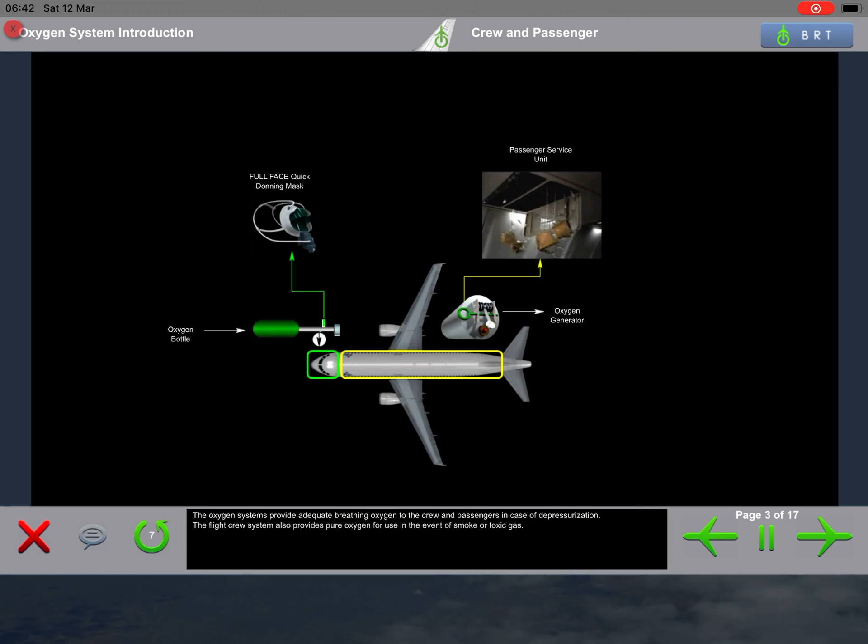A system for the flight deck, a system for the cabin, a portable oxygen system. The oxygen systems provide adequate breathing oxygen to the crew and passengers in case of depressurization. The flight crew system also provides pure oxygen for use in the event of smoke or toxic gas.

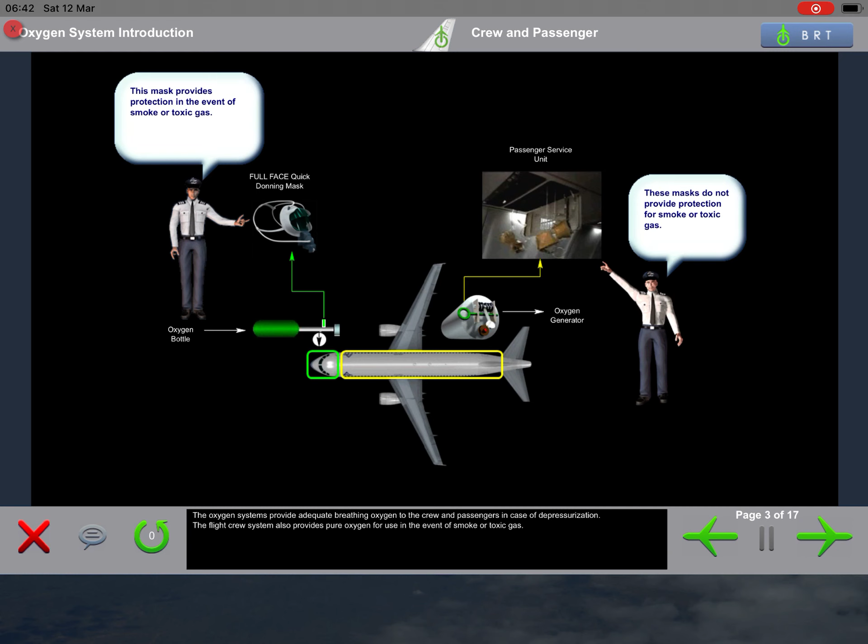The oxygen panel is located on the forward left side of the flight deck overhead panel. Normally, the mask manual on switch guard is closed, the passenger system on light is out, and the crew supply push button is on.

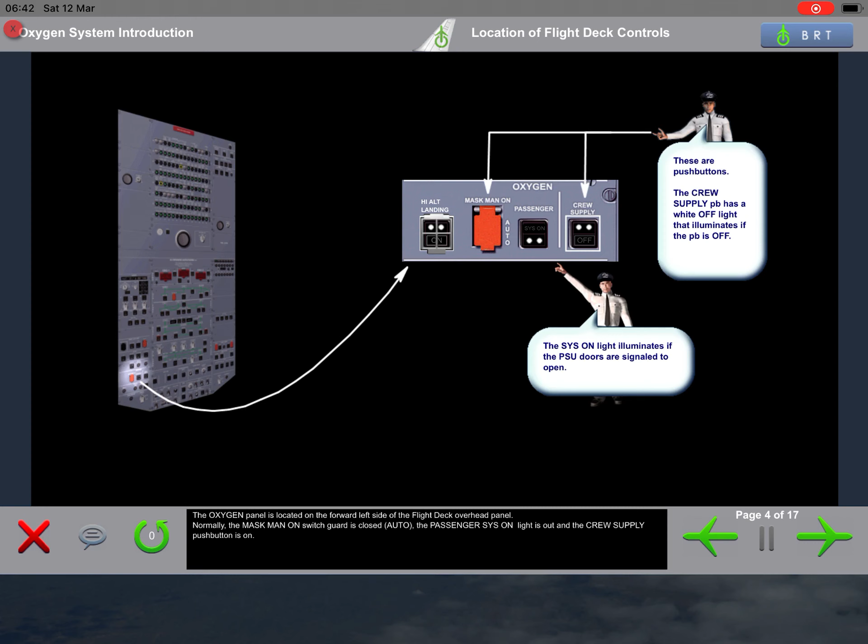The flight deck oxygen system is a gaseous bottle system that delivers regulated oxygen upon demand or can provide forced oxygen. It will provide diluted oxygen upon demand up to a cabin altitude of 35,000 feet, and above this cabin altitude will force oxygen at 100% to the crew member.

There is also an emergency feature designed to provide forced 100% oxygen pressure flow to the crew member upon selection of the emergency mode.

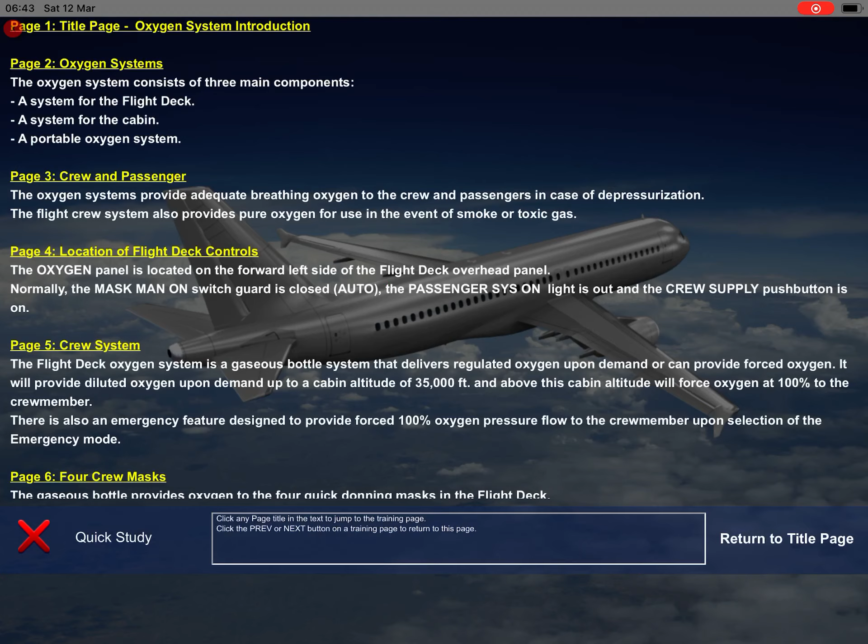The gaseous bottle provides oxygen to the 4 quick donning masks in the flight deck. 1 pilot mask and 1 observer mask are contained in separate stowage boxes within 2 covered compartments in the console outboard of each pilot seat. Each crew mask is equipped with a microphone, but the 4th occupant has no transmitting capability.

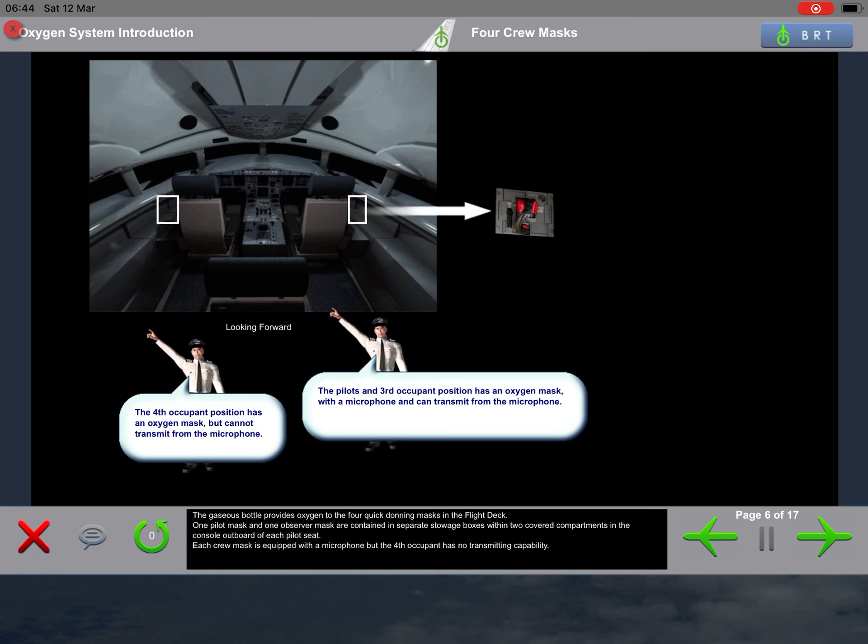The door Oxy ECAM page displays the unregulated oxygen bottle pressure. This ECAM page will also provide amber indications if the system is off or the pressure is low.

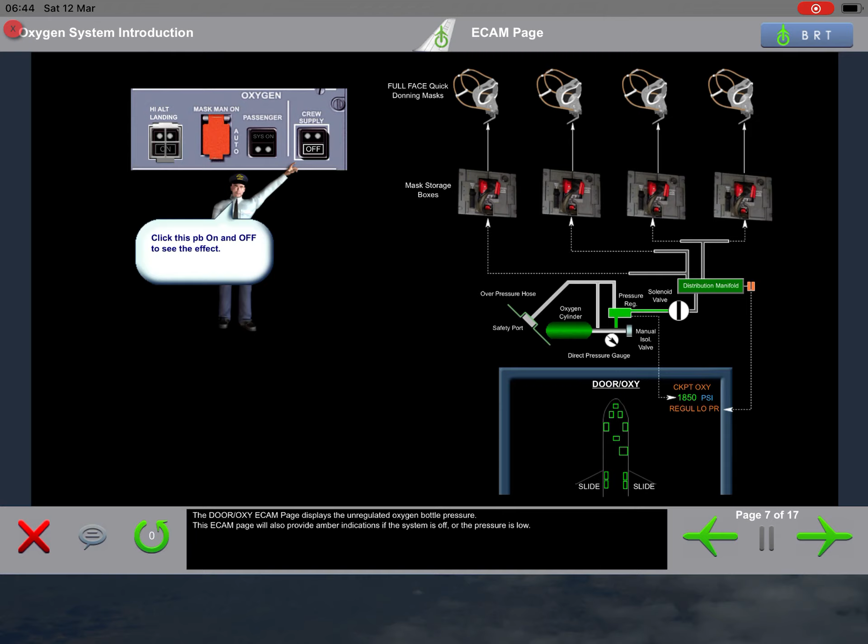The cabin oxygen system is available to all passengers and flight attendants and is separate from the flight deck oxygen system. The cabin oxygen system is a continuous flow system. The amount of oxygen delivered to each mask is very low and is added to the ambient air that is drawn in by the user through valves in the front of the mask. The cabin system is designed for a depressurization event and does not provide smoke protection.

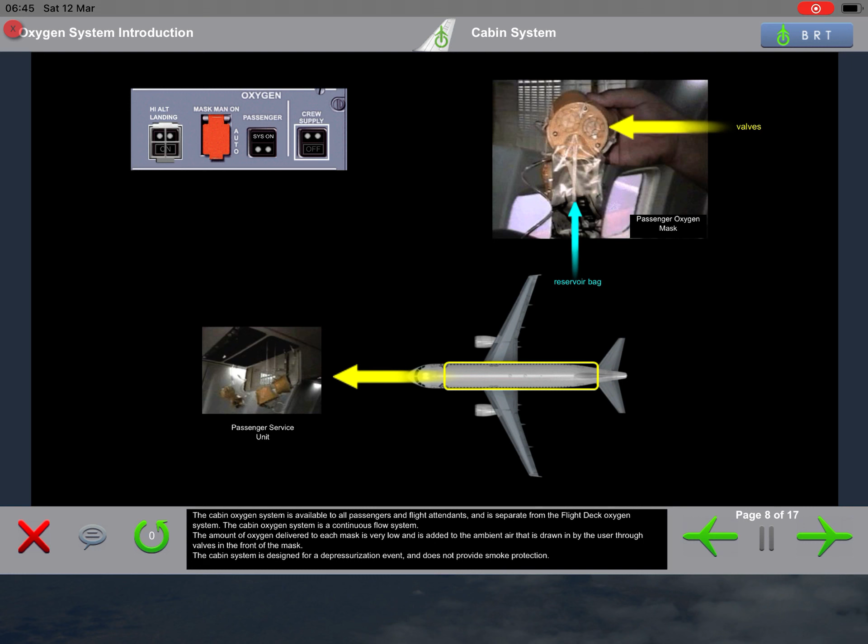The cabin oxygen is supplied by chemical generators that are located throughout the cabin. Each generator can provide oxygen for about 15 minutes to 2, 3, or 4 masks as equipped. The masks and associated generators are installed in containers above the passenger seats, in the lavatories, in each galley, and at each cabin crew station.

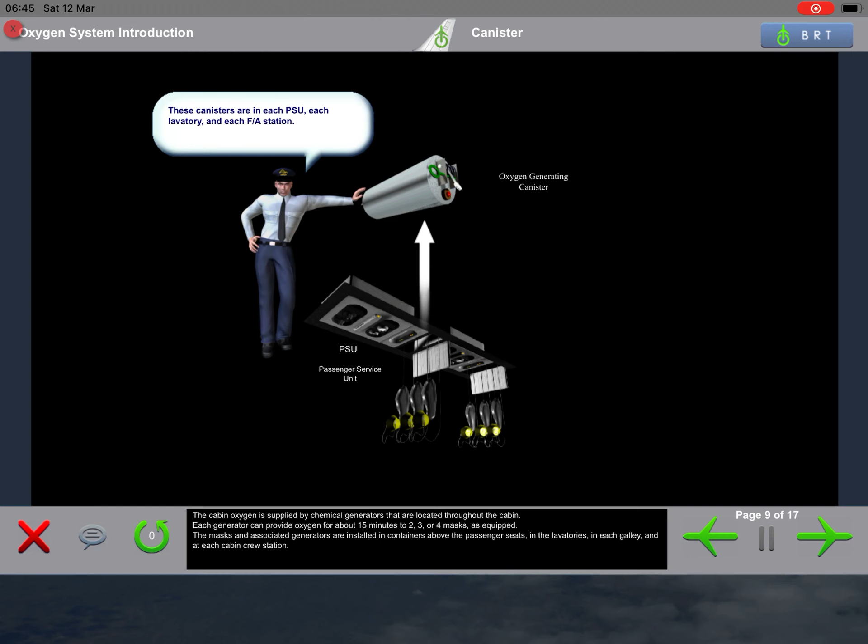Cabin oxygen is automatically presented to persons in the cabin when the cabin altitude exceeds 14,000 feet. The cabin oxygen can also be manually presented by use of a switch in the flight deck.

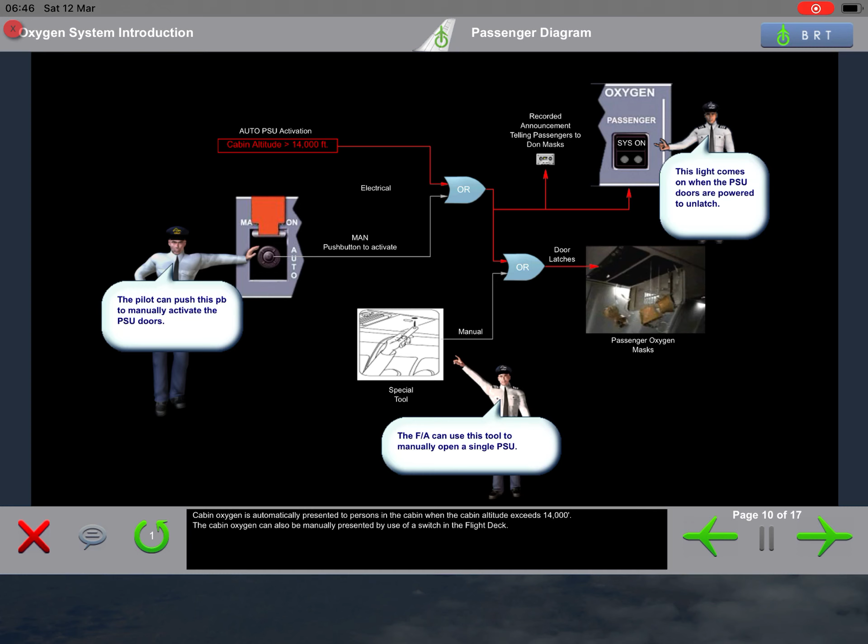The portable oxygen system is located in the left backside of the flight deck. The system consists of a sealed container that contains a smoke hood. The hood is serviceable as long as the yellow indicator on the case is not broken.

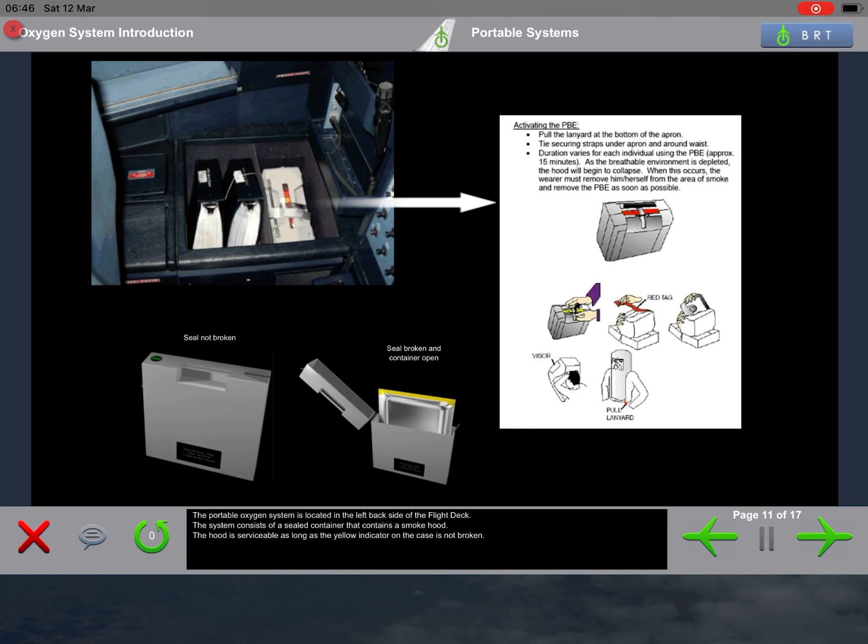The smoke hood is designed to protect the eyes and respiratory system of a crew member while fighting a fire, and to provide oxygen if the cabin loses pressure. The smoke hood has a chemical air regeneration system. It regenerates the exhaled air of the user through the regeneration system to make the air breathable. Once the regeneration is activated, it provides air for at least 20 minutes.

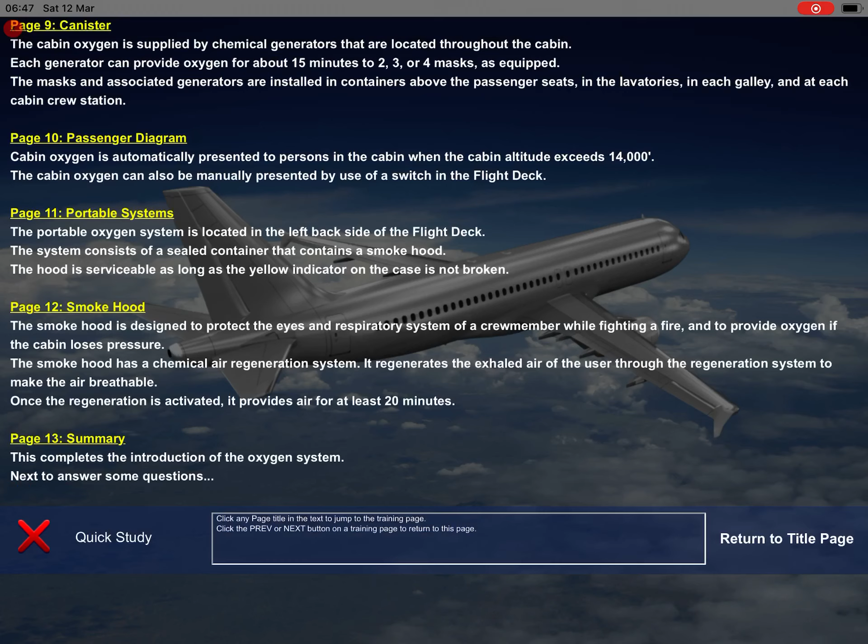This completes the introduction of the oxygen system. Next, to answer some questions.

Cabin oxygen is provided by chemical generator canisters that are stored in containers along with the associated hoses and masks. There are 2, 3, or 4 masks attached to each generator. The presentation of the masks to the users is provided by opening the container door. The containers are provided in the passenger service units, lavatories, and flight attendant stations.

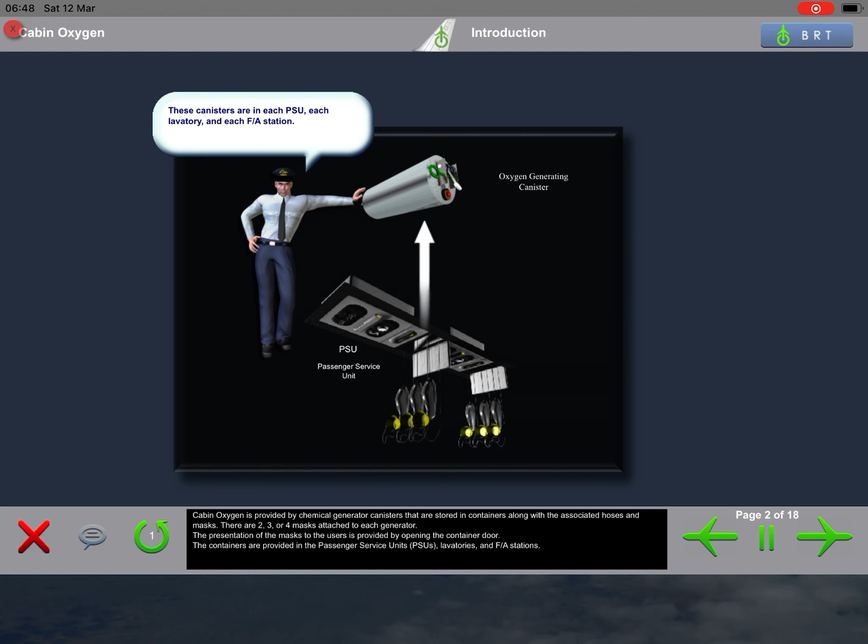The container door latch is normally released when electrical power is applied to the door solenoid. Automatic door opening is initiated by a signal from an altitude sensing aneroid to all container doors. This automatic deployment of the masks is set to operate at 14,000 feet cabin altitude.

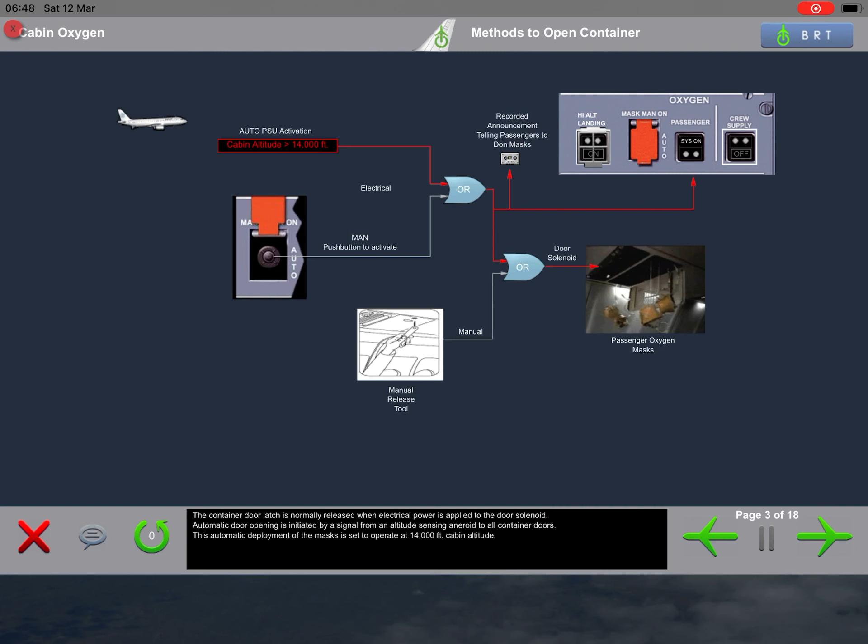Some aircraft have a high-altitude push button that changes the altitude for automatic mask deployment. Selecting the high-altitude landing push button to on changes the automatic mask deployment altitude from 14,000 feet to 16,000 feet. Check your procedures for operating into high-altitude airports.

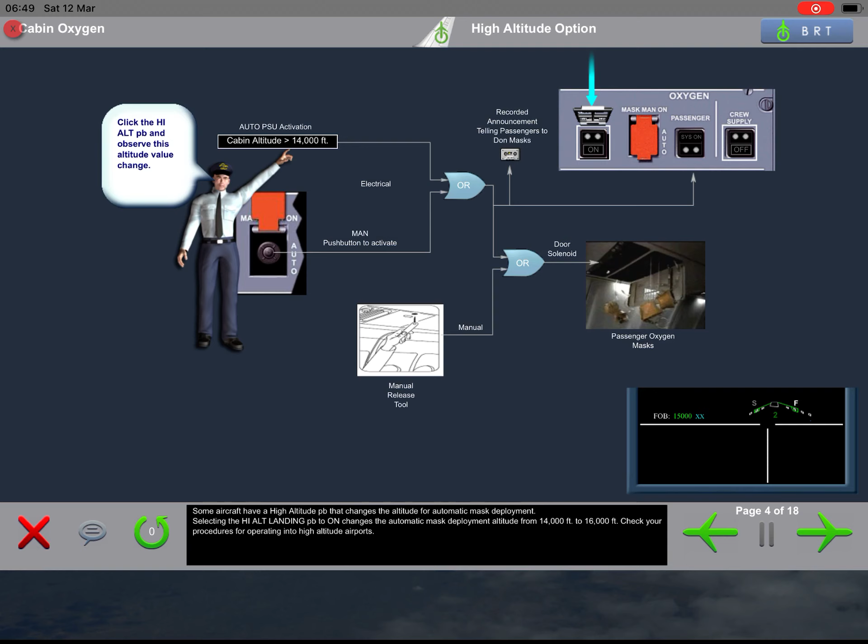If necessary, a pilot can push the mask manual on push button to manually signal the door solenoids to release. When the door solenoids have been powered to open the doors, automatically or manually, the white system on light illuminates, and the passenger address system broadcasts a pre-recorded instruction of how to don the masks.

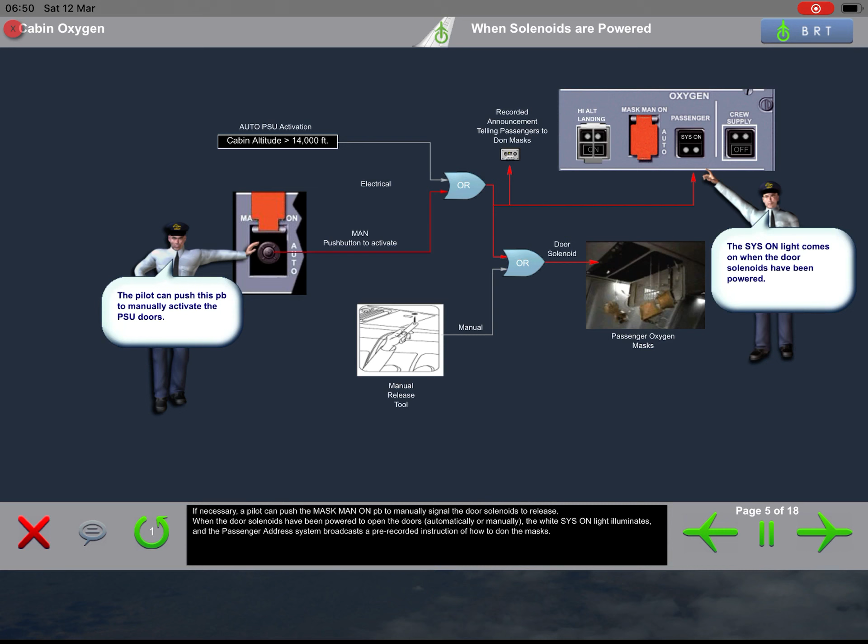A single container door can be manually opened by use of a manual release tool. Pushing the pin of this tool into the small hole of the door will cause the door latch to be released. This action may be necessary to open a door that has failed to open via the solenoid action. Note: the system on light will not illuminate if the door is opened with the MRT.

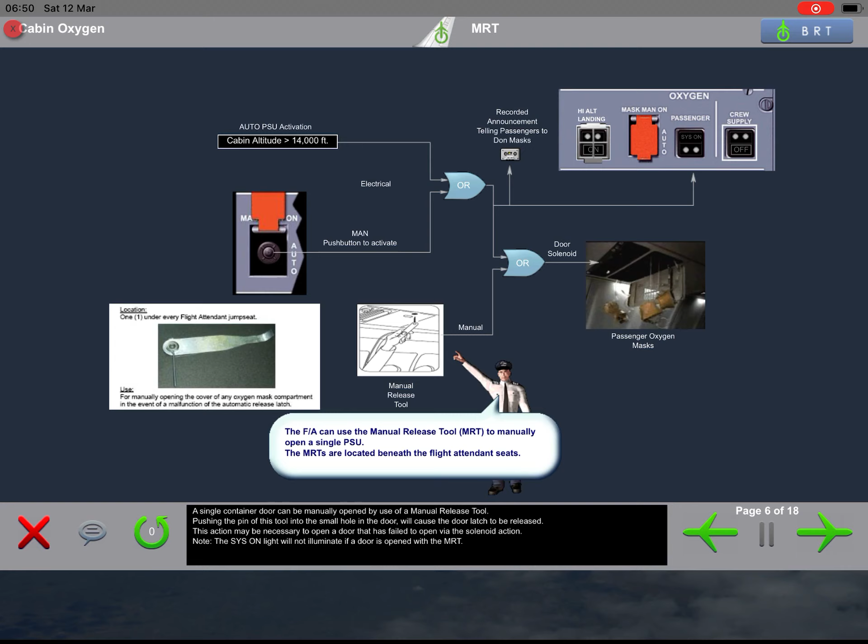The generator is activated by the first person to pull a mask toward their face. Pulling the mask pulls a lanyard to a firing pin, which snaps to activate the generator.

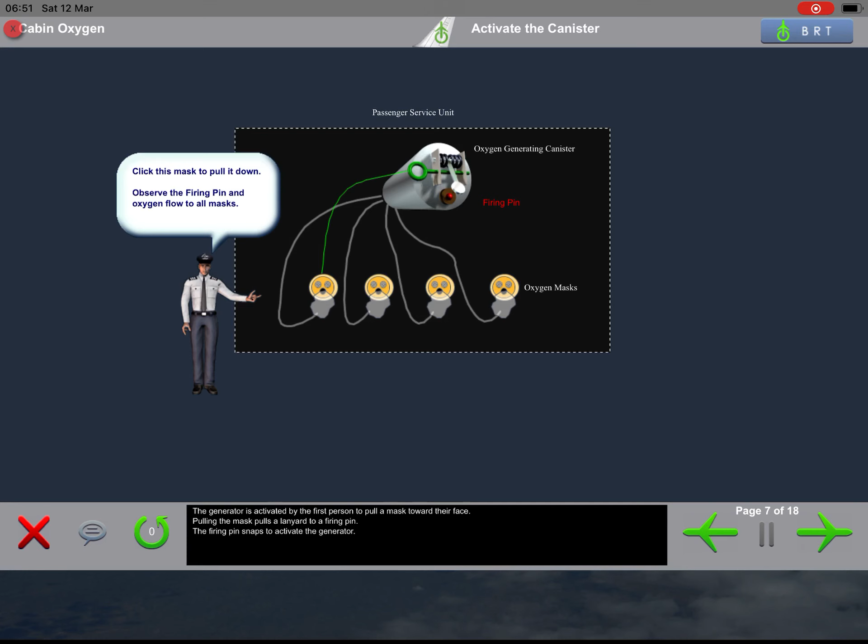When the generator is activated, pure oxygen flows from the generator through the hoses to all masks. Once activated, the generators create oxygen for about 15 minutes.

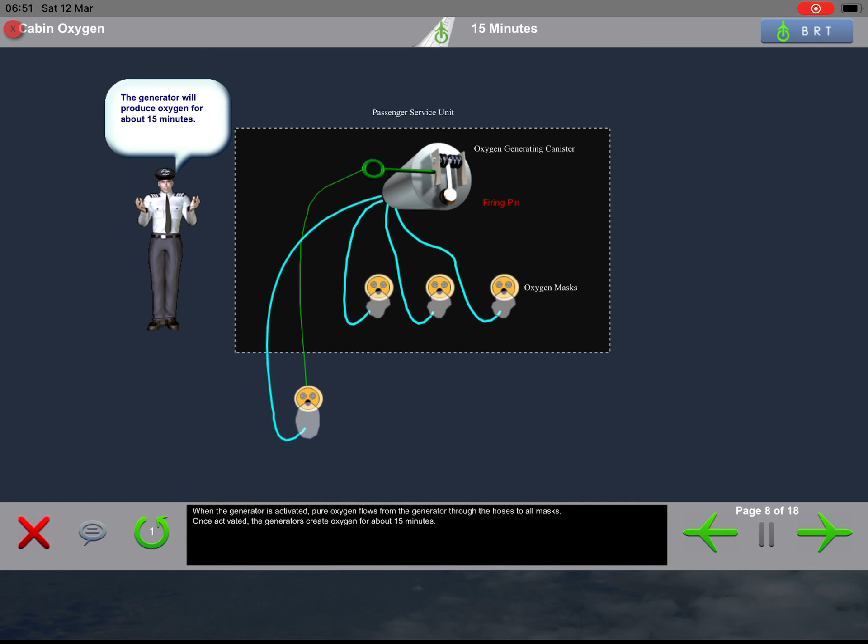The amount of oxygen flow is very low, and a majority of the air a person breathes is drawn in through the ambient air valves on the front of the mask.

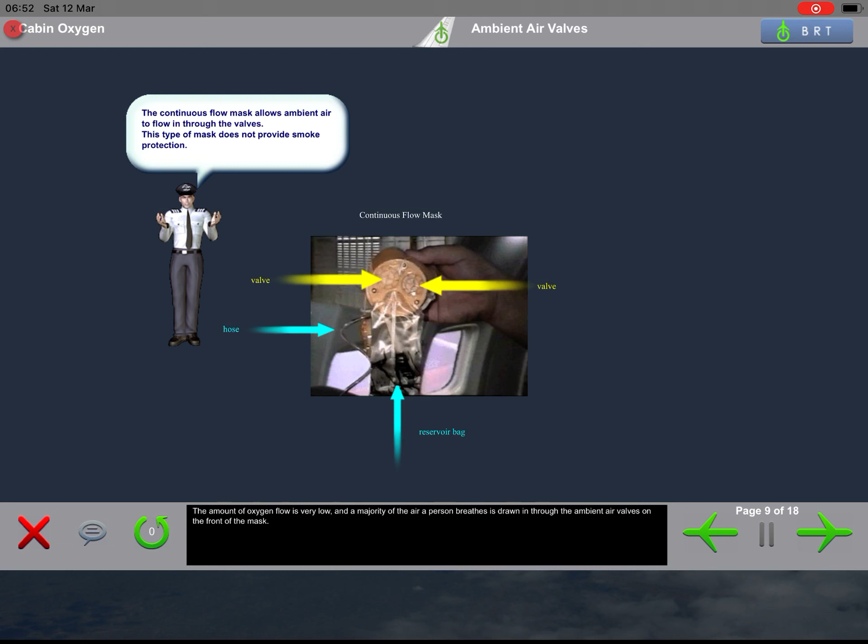The chemical process generates heat. The surface temperature of a generator is extremely hot, and a burning odor may be detected along with an increase in cabin temperature. The generators should never be touched after they have been activated.

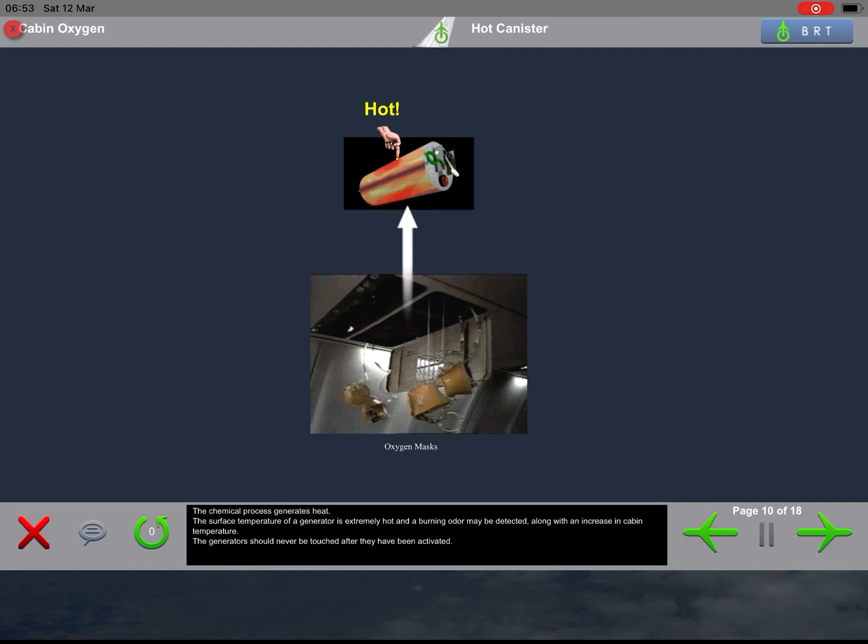The only normal procedure for this system is that during the pre-flight, the system on light is extinguished, and during the cabin pre-flight, all container doors are verified closed. This completes the description of the cabin oxygen system. Next, to answer some questions.

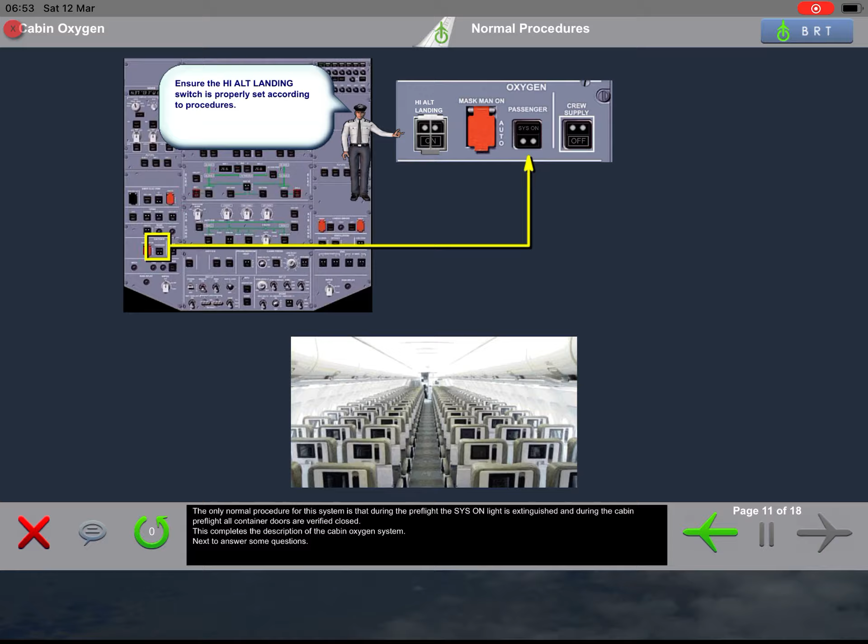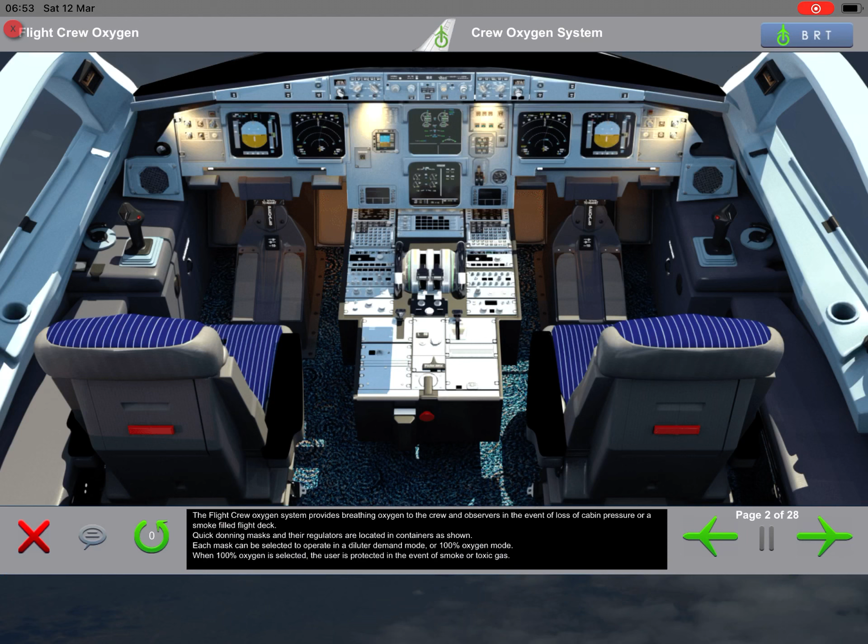The flight crew oxygen system provides breathing oxygen to the crew and observers in the event of loss of cabin pressure or a smoke-filled flight deck. Quick donning masks and their regulators are located in containers as shown.

Each mask can be selected to operate in a diluter demand mode, or 100% oxygen mode. When 100% oxygen is selected, the user is protected in the event of smoke or toxic gas.

This diagram shows the components and sensor locations of the crew oxygen system. The oxygen cylinder is located in the avionics compartment, and the unregulated bottle pressure is displayed on the ECAM door oxy page.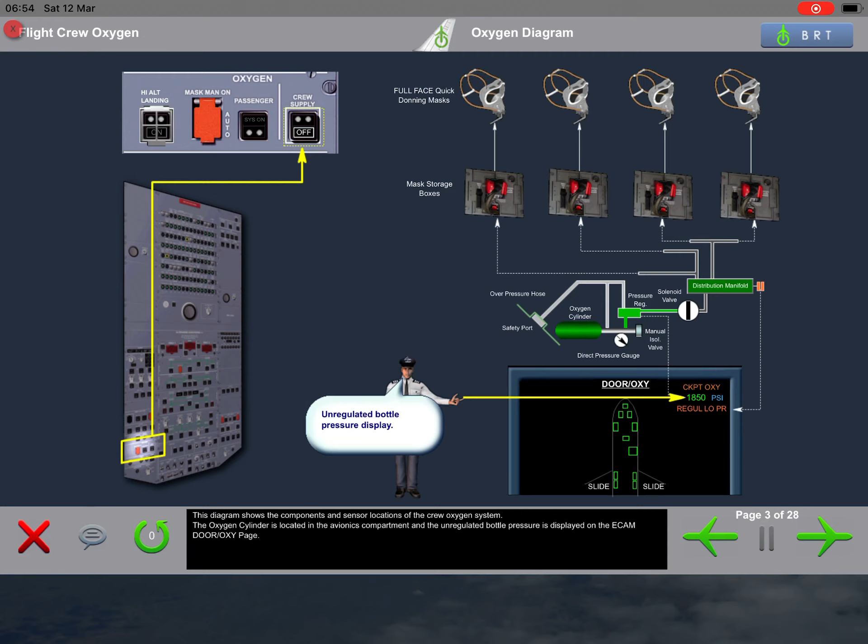During the exterior pre-flight inspection, check the condition of the oxygen bay door and verify that the green oxygen discharge overpressure disc is present.

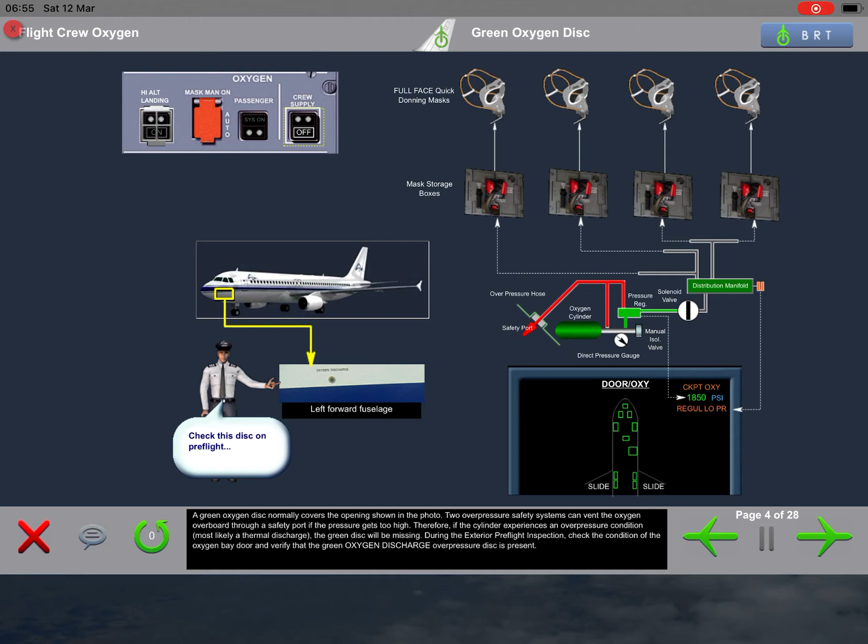A pressure regulator is connected directly to the cylinder that delivers oxygen at a pressure suitable for the users. A supply solenoid valve allows the crew to shut off the distribution system. The solenoid valve is controlled by the crew supply push button.

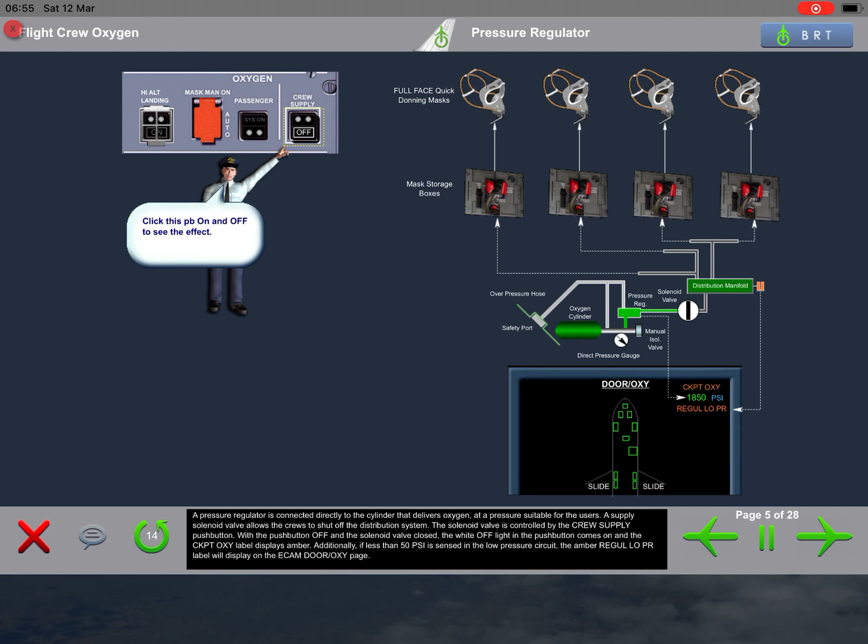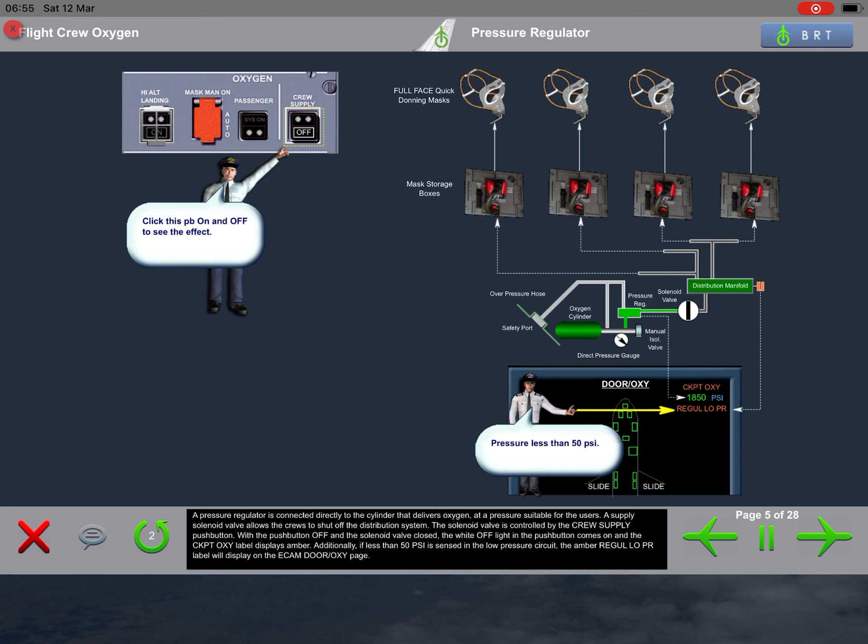With the push button off and the solenoid valve closed, the white off light in the push button comes on, and the cockpit oxygen label displays amber. Additionally, if less than 50 psi is sensed in the low pressure circuit, the amber regulator low pressure label will display on the ECAM door oxy page.

The crew supply push button is switched on before flight. This action causes the solenoid valve to open and allows oxygen to be available to the system distribution manifold. The push button off light goes out when the push button is on. With normal pressure available, the cockpit oxygen label displays white and the amber regulator low pressure label blanks.

You can click the crew supply push button on or off and note the effect on the push button, diagram, and ECAM.

The unregulated bottle pressure is normally displayed in green on the ECAM door oxygen page. With the aircraft on the ground, if the pressure is below 1,000 pounds per square inch, an amber half frame appears. During pre-flight, this display indicates that you should consult your manual to ensure the remaining pressure is not below the minimum required for the crew and number of observers in your flight deck.

If the bottle pressure is below 600 pounds per square inch, the pressure display pulses. If the pressure is below 300 pounds per square inch, the pressure displays in amber and the cockpit oxygen label displays in amber. This low pressure situation will cause the ECAM door oxy page to automatically appear.

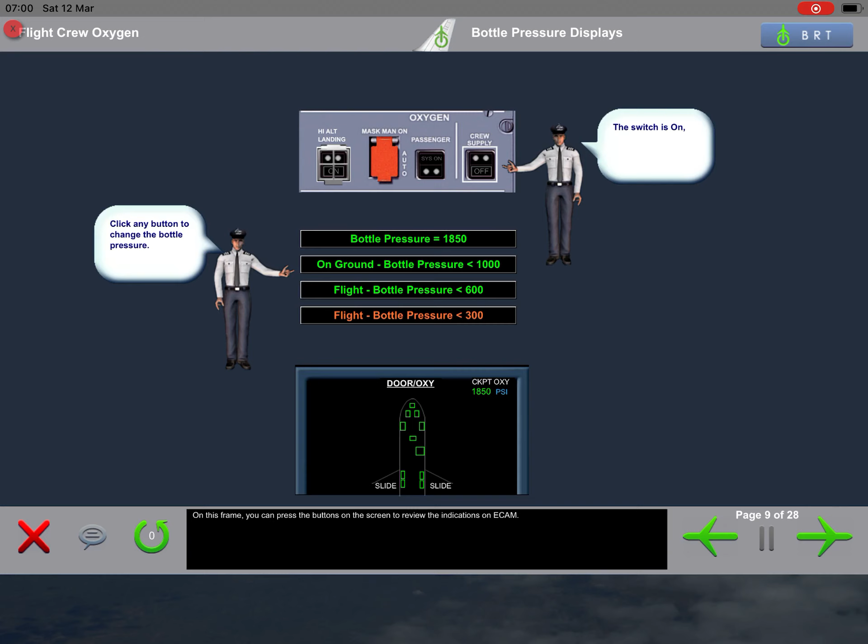There are a number of controls and indicators on the stowage box for each oxygen mask. The pressure regulator and its controls are located on the front of the mask. The two red grips, located on either side of the mask, are squeezed to pull the mask from the stowage box and to cause the harness to inflate.

We'll describe these before we continue with the pre-flight test of the system.

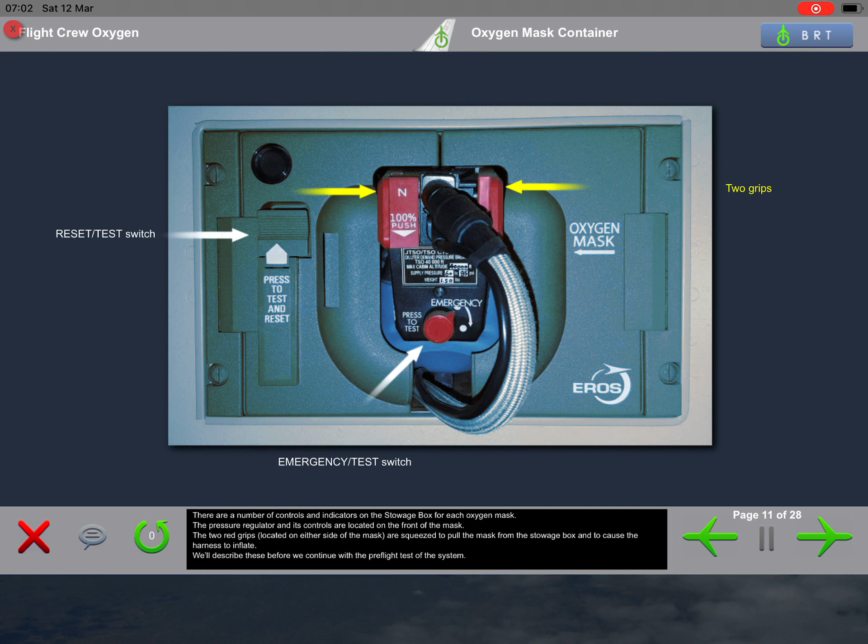At the top left of the stowage box is a blinker flow meter, which is a yellow cross that appears when oxygen is flowing to the mask.

Below the flow meter is the reset test switch. This switch allows the crew member to test the oxygen mask without removing it from the stowage box. Now we show the specific items that are tested when you press the switch.

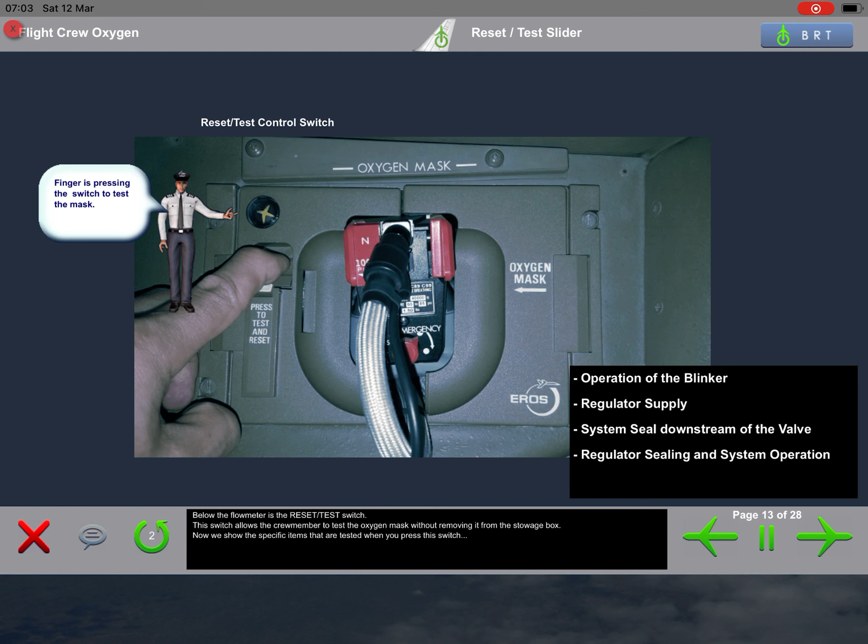Pulling the mask from the stowage box initiates the flow of oxygen and activates the mask microphone. After a mask has been used, you must press the reset test switch to shut off the oxygen flow and to disable the mask microphone.

If the stowage box left door is closed when the oxygen is flowing to the mask, an oxygen on flag will appear because the mask is still provided with oxygen.

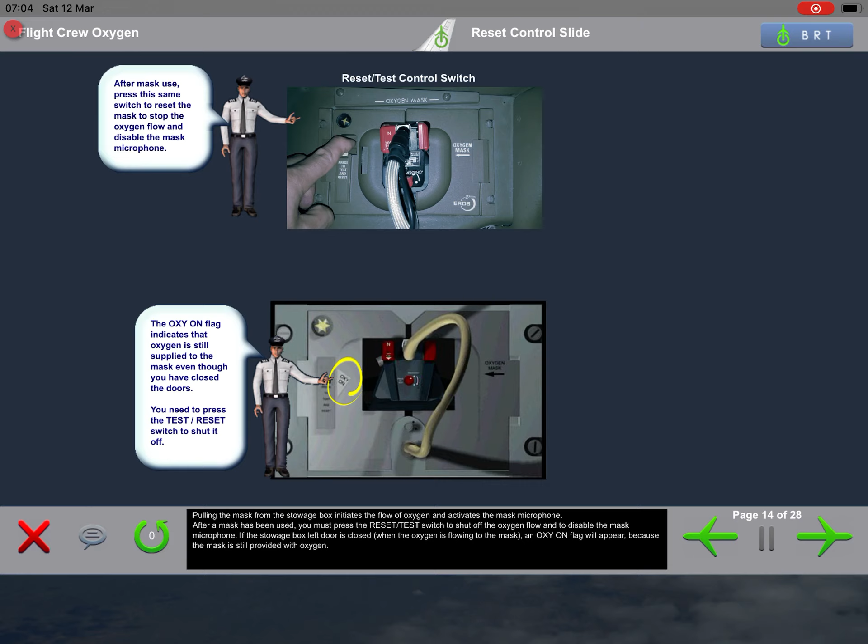The pressure regulator and its controls are located on front of the mask. There is an emergency pressure selector located at the bottom of the pressure regulator. Pushing the selector will generate a momentary overpressure condition.

This feature can be used to clear the goggles of smoke by causing a forced oxygen flow. Turning the selector knob clockwise in the direction of the arrow will lock the overpressure condition to supply forced oxygen continuously. Note: if cabin altitude exceeds 30,000 feet, overpressure supply is automatically started.

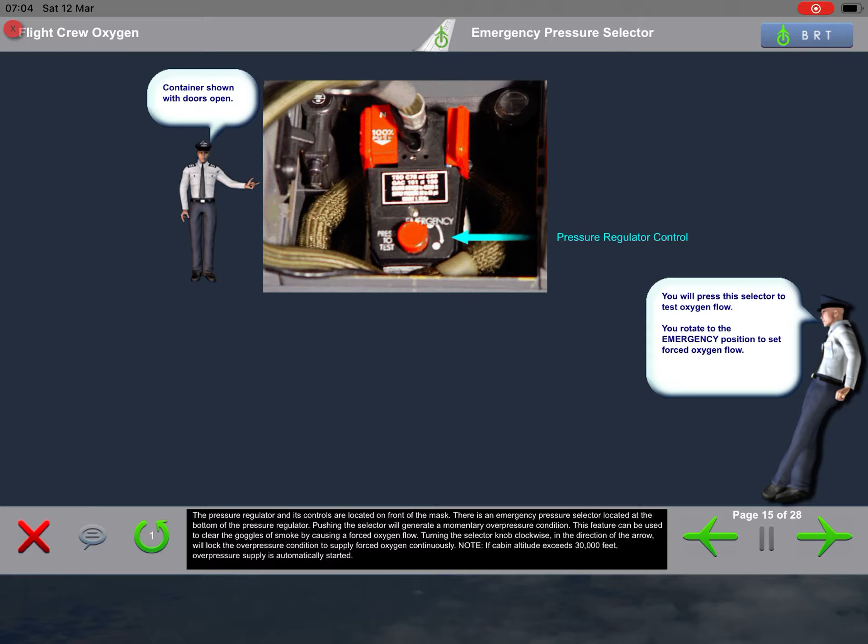There is a normal 100% selector located on the upper left of the pressure regulator. Pushing it down will cause the mask to deliver 100% oxygen. This is the position for dispatch.

Pull the selector up to return it to the normal position, which provides a mixture of ambient air and oxygen. In normal, the air-oxygen percentage varies with cabin altitude. Above 35,000 feet cabin altitude, the user will breathe 100% oxygen at forced supply, regardless of the switch position.

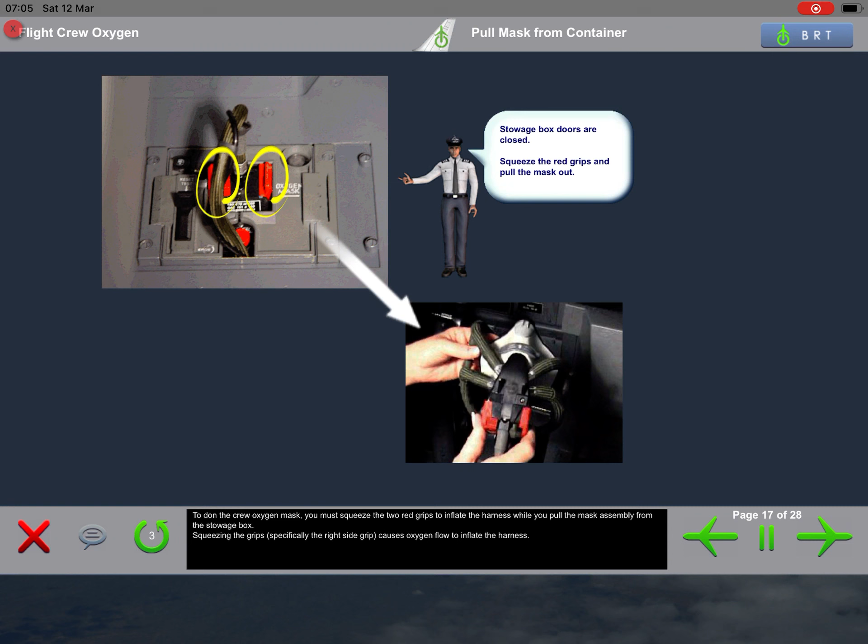To don the crew oxygen mask, you must squeeze the two red grips to inflate the harness while you pull the mask assembly from the stowage box. Squeezing the grips, specifically the right side grip, causes oxygen flow to inflate the harness.

While squeezing the grips, place the mask assembly over your head and use a sweeping motion to pull the mask down over your nose and mouth. As long as the red grips remain squeezed, the harness remains inflated.

When the mask is in the desired position, release the grips. When the grips are released, the harness deflates to tighten around your head and the mask will seal to your nose and mouth.

Further adjustments can be made by squeezing the grips to inflate the harness, reposition the mask for a better fit, and then release the grips when the mask is in position.

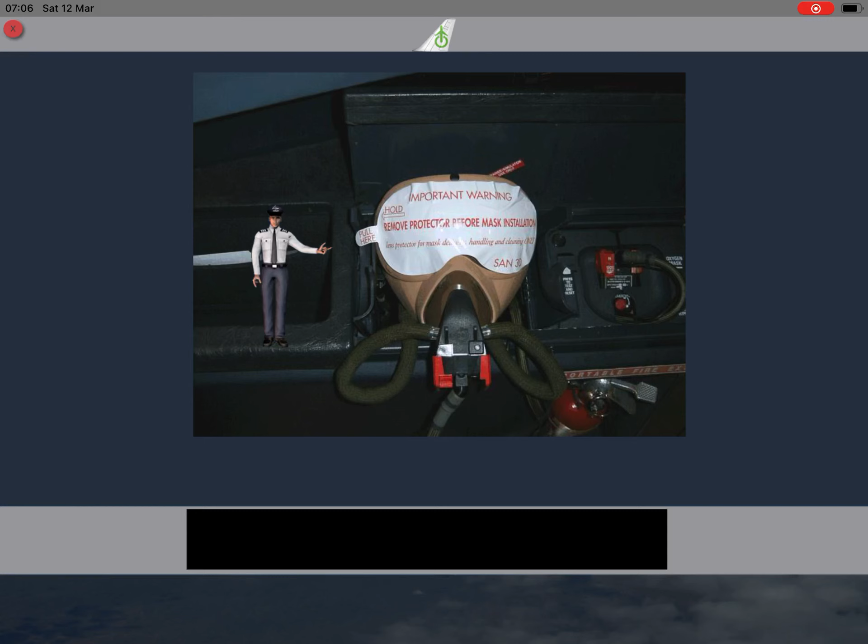As shown here, some masks have a removable protective plastic strip. The strip must be removed for proper vision during use.

We now describe the normal procedures prior to flight. If the system is turned off when you arrive in the cockpit, the white off light will be illuminated on the crew supply push button, and oxygen is not supplied to the mask regulators.

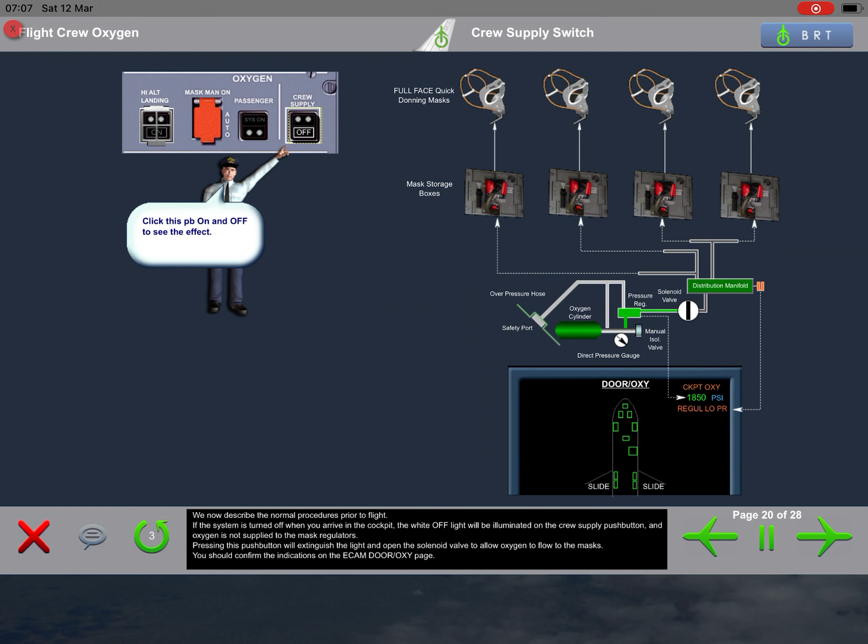Pressing this push button will extinguish the light and open the solenoid valve to allow oxygen to flow to the masks. You should confirm the indications on the ECAM door oxygen page.

The masks must be tested prior to flight and remain in the stowage box during the test. During the oxygen mask test, you can also test the mask microphone by listening for the oxygen flow sound in the mask. To set this up:

1. Turn on the loudspeakers on the glare shield, and 2. On the audio control panel, press out and adjust the interphone reception knob for the desired volume, and 3. Select the INT/RAD switch to interphone. These actions will deliver the oxygen flow sound over the cockpit interphone when you test the mask.

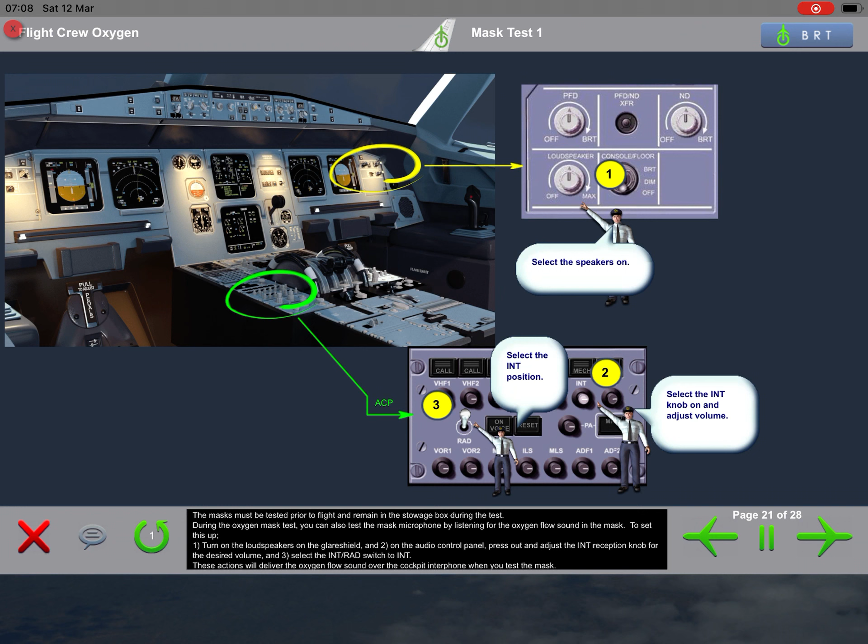Now press and hold the Reset Test switch. The flow blinker shows yellow for a short time, and then shows black. You should hear the oxygen flow sound while the blinker is yellow.

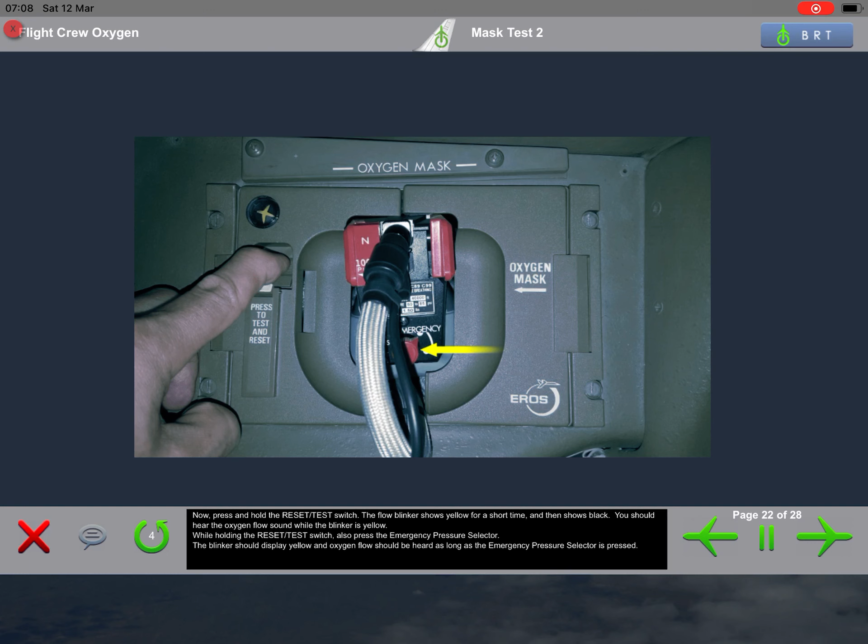While holding the Reset Test switch, also press the emergency pressure selector. The blinker should display yellow and the oxygen flow should be heard as long as the emergency pressure selector is pressed.

Release the emergency pressure selector and Reset Test switch and ensure they return to their normal positions. The blinker should blank and the sound should stop.

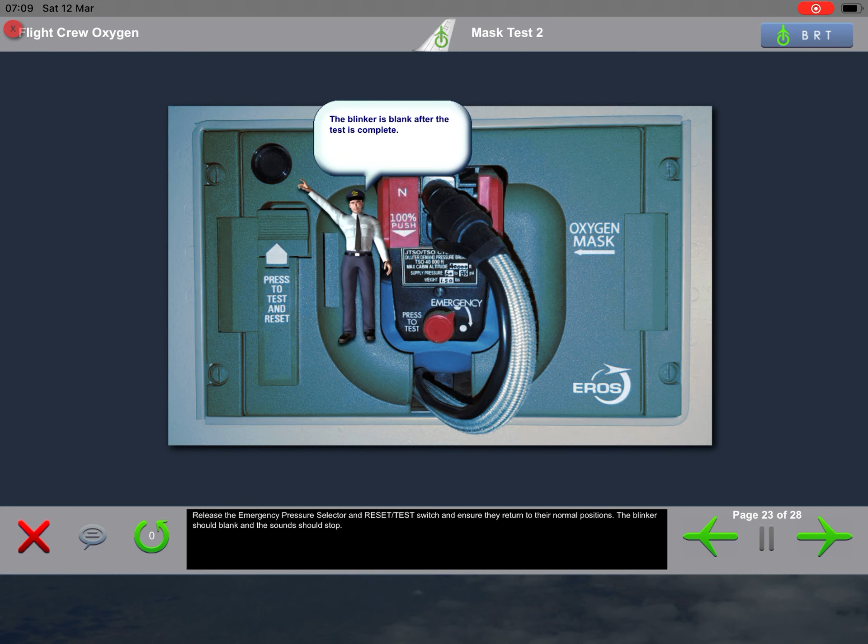Verify that the normal 100% selector is in the 100% position. Now press the emergency pressure selector by itself and verify that the flow blinker does not display yellow.

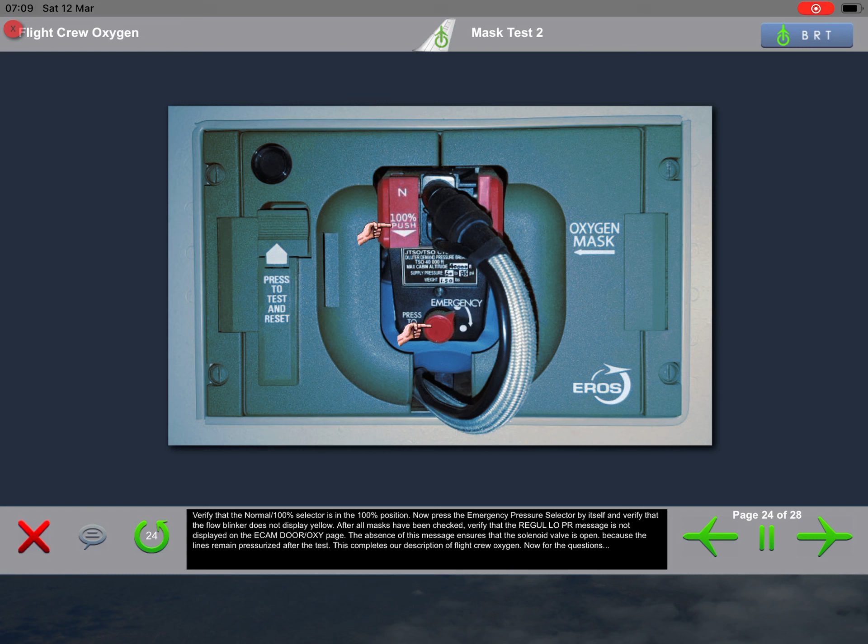After all masks have been checked, verify that the regulator low pressure message is not displayed on the ECAM door oxy page. The absence of this message ensures that the solenoid valve is open because the lines remain pressurized after the test.

This completes our description of flight crew oxygen. Now for the questions.